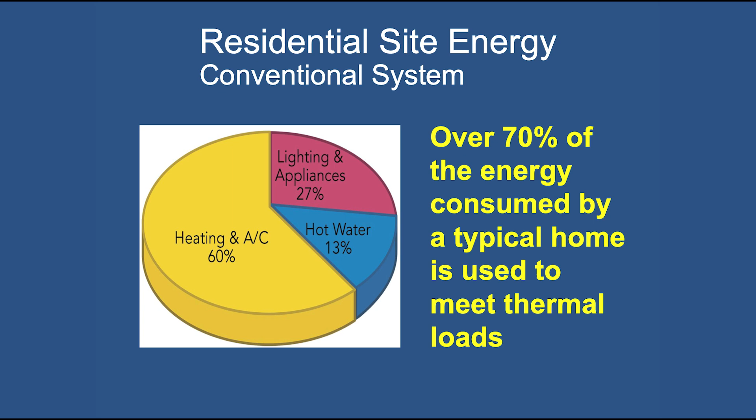Commonly, as many of you know, in the average residential home, over 70% of the energy used in the home goes to the heating and air conditioning and the hot water use. By going to geothermal, we can commonly extract near 50% of that energy from the ground, and by using 18% of energy, which we're using from electricity to run our geothermal heat pump, we can run our home and our air conditioning for the house.

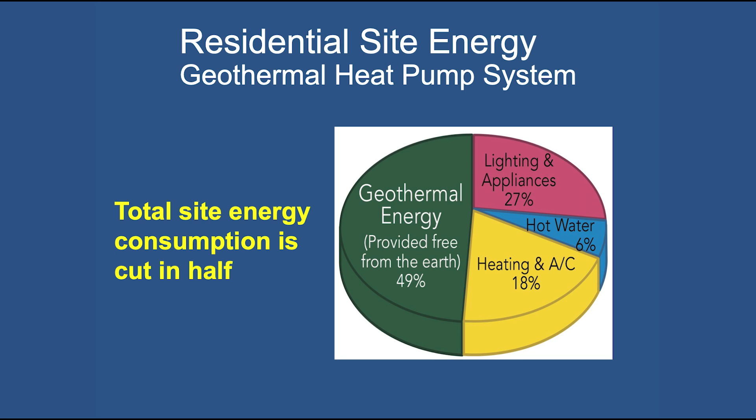So how does geothermal work? I like to break up the system into 3 portions. There's the earth coupling, which is the fancy word for what's outside. There's the heat pump, and then the distribution system in your home. Let's first look at the heat pump. I have a big stand here, but that would be an example of what would replace your furnace. It doesn't look a whole lot different than your furnace now, maybe a little bit taller, commonly 5 feet tall with a footprint of 3 foot by 3 foot.

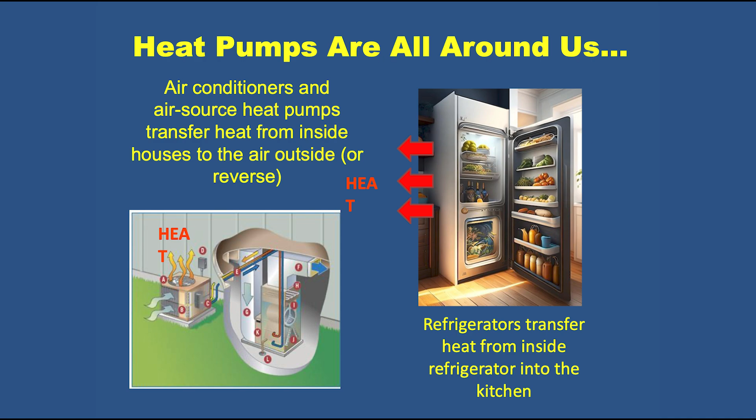So how do heat pumps work? Everybody in this room today has a heat pump in their house. Your refrigerator. The refrigerator takes heat out of the inside of your fridge and delivers it to your kitchen. If you've ever put your hand on the back of the fridge or the bottom of the fridge, you notice the air is warm, about 90 degrees. A geothermal heat pump or any heat pump works on that same technology.

We're moving heat. So instead of taking energy out of your 30-degree fridge or your 0-degree freezer, we're taking energy out of 50-degree water. And we are able to produce 110-degree air or 115 to 120-degree water to then heat our homes. So I love to look at this visual. The original refrigerators, you truly got to see the condenser where you were rejecting the heat in the fridge. Nowadays they like to hide it because they don't want you to see it anymore. And if we don't clean our filters, our fridge locks up because it doesn't get good airflow across the coil in the back.

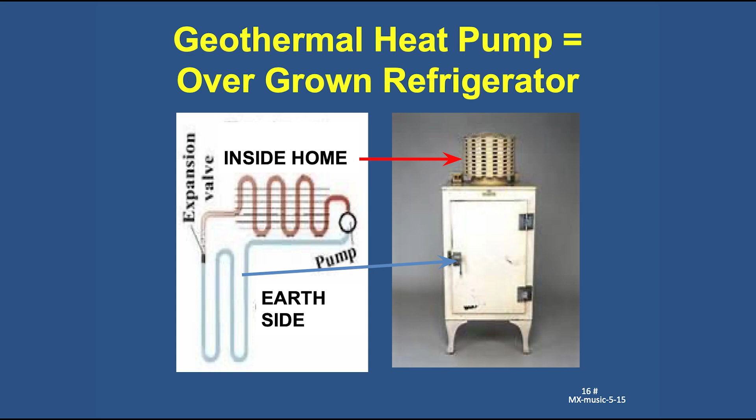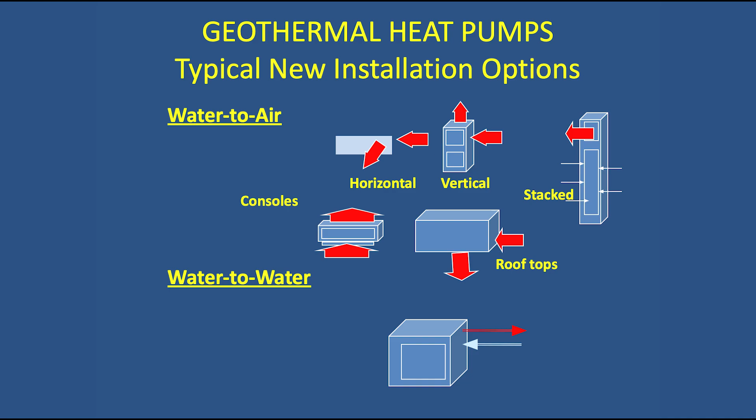So, how geothermal works. We have what's known as water-to-air or water-to-water systems. Mini splits, what many of you might be more familiar with, are known as air-to-air. And what that is, is where we're taking the energy from outside and how we're delivering it to the building. So if we were to replace a furnace that has hot or chilled air in the house, for geothermal, that would be a water-to-air application. Or if we were replacing a boiler, that would be a water-to-water application. So how does that work?

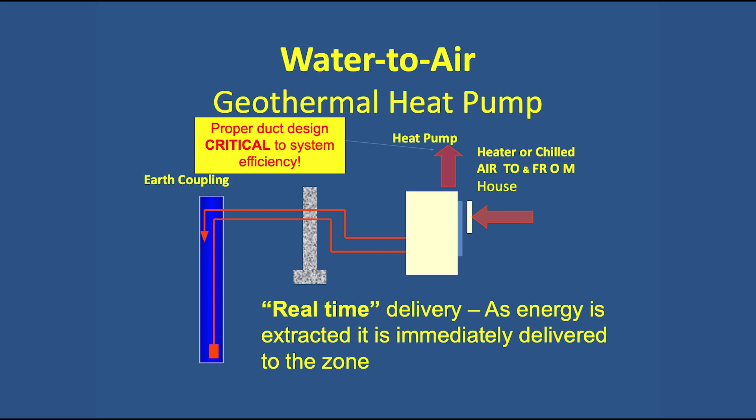We have a well outside the system, and I'm going to be talking about the different wells. We are circulating water through our heat pump, and I'll have some examples of what heat exchangers look like later. We're just circulating water through the geothermal well system and extracting heat from it, commonly 5 degrees of heat, which we're able to compress in the refrigeration cycle and heat our homes with.

On a boiler application, or furnace application, this is what it would look like. Replacing a boiler, we would have a heat pump that looks much like your boiler now, and that would heat a hot tank of water, or in the air conditioning months, a cold tank of water. Then we would recirculate water through our house from that.

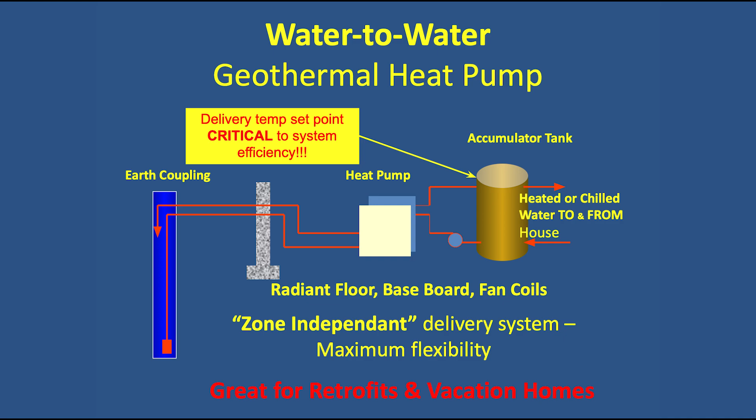Now, earth coupling. There are 3 main types of earth couplings, but in New England we really only see 2 of them. So we have standing column wells, open to injection wells, and closed loop wells. The last numbers I saw, about 80% of the residential systems installed in Massachusetts were closed loop wells.

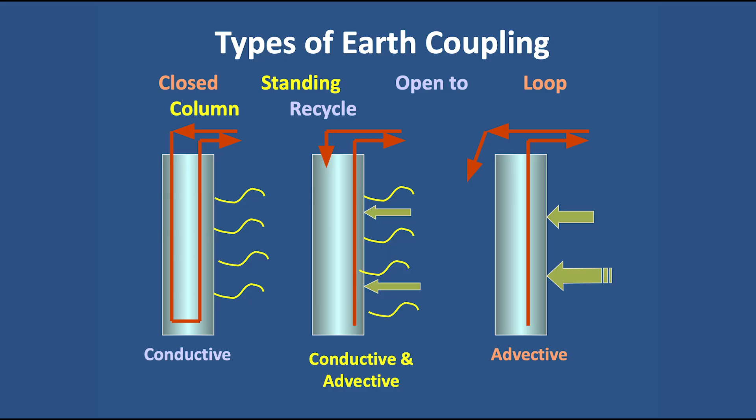Here, in a very plain way of looking at it, are the 3 well types. Starting all the way to the left, we have a closed loop. I like to think of this like a radiator buried in the ground. They've drilled a hole, and we've buried a pipe, and we're recirculating water through that pipe, and no earth water is going in and out of the building.

All the way to the right is what's known as an open to injection loop, or open to recycle. These are the least common systems. Where you see these are on Cape Cod or on Long Island. This is a well where we hit a significant amount of water, and we're never returning that water back to the same well - a well producing 100 gallons a minute. That's extremely rare in your average areas, but on Cape Cod and Long Island it's extremely common because they have a lot of water.

In the middle here, we have what's known as a standing column well, which is where we drill a well like your domestic water well or drinking water well, and then we run a return pipe back to it, and recirculate the water that way. I'll have a couple more examples and pictures later.

If you're curious, the heat transfer: you have advective heat flow in the open loop because the fresh water is always bringing it in. A closed loop only has conductive heat because the heat has to work its way through a plastic pipe, which I'll have examples of later. A standing column well is both.

So closed loop, again the most common in Massachusetts, you have both horizontal and vertical closed loop wells. In 16 and a half years doing geothermal, I have seen 5 horizontal closed loop wells because we just have too much rock in New England to drill horizontal well fields. In Oklahoma and Nebraska, they do plenty of horizontal systems, but in New England you only see vertical well systems.

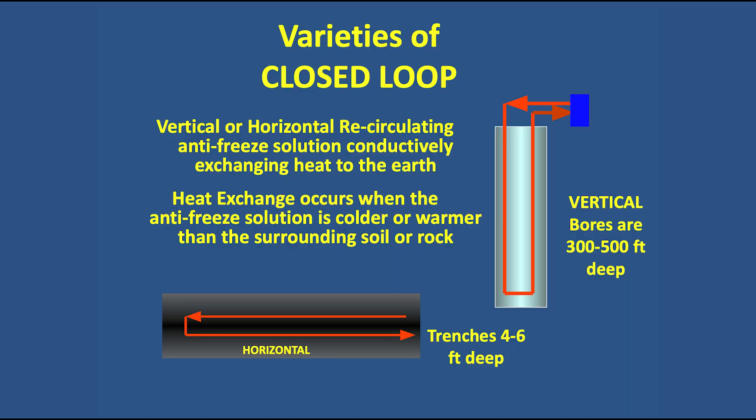The Squamscott Elementary School is installing a vertical closed-loop well system, actually drilling 85 500-foot boreholes for that elementary school, arranged in a grid formation, which goes to a geothermal vault, and then we pipe that water into the system. Total flow of that building is around 300 gallons a minute.

Other horizontal systems I like to share are slinky systems, which literally look like the old slinky toy we played with as kids - they just stretch it out in the hole. Or most vertical systems, I'll show you, and I also have an example of a concentric later.

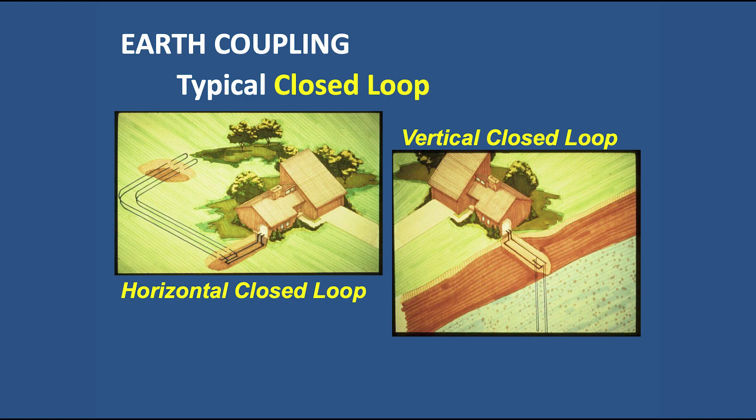Here's what your average residential system would look like. Your average residential system has 2 to 3 boreholes - again, the example on the right, not the example on the left. The only times I've seen a horizontal well installed is when the homeowner was his own civil contractor, so digging a trench wasn't that big of a deal for him.

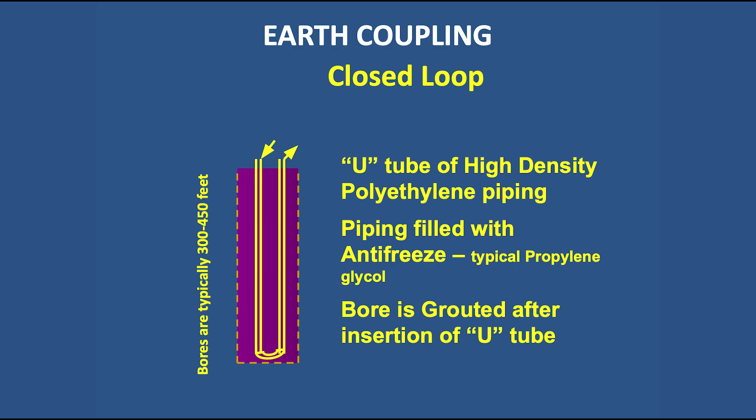Again, what that closed loop well looks like: they're commonly drilling 300 to 500 feet deep, commonly 4 to 5 inches wide, and then we're burying a 1.25 inch pipe all the way down and back up the well, circulating a water and glycol mixture through that. We're using propylene glycol, which is environmentally friendly, so god forbid we ever have a leak, it's not detrimental to the environment. Unfortunately, some states still allow ethanol and methanol, but luckily Massachusetts is not one of them.

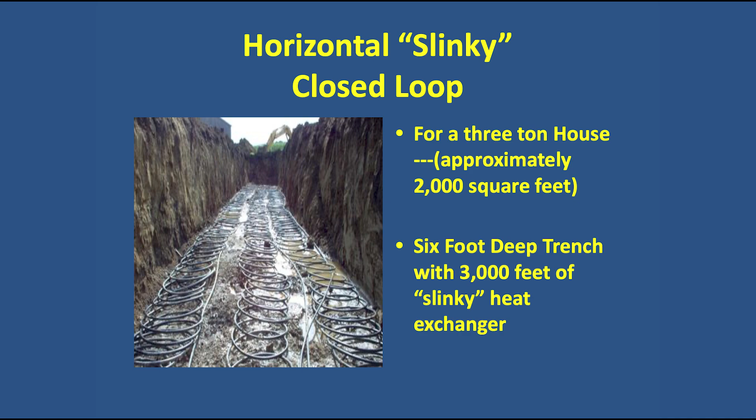It's a closed loop system. What happens is when the loop gets charged, it actually sinks to the bottom of the pond. So what you need is a minimum depth and a minimum area of the pond. These aren't common, but they are more common than you might believe.

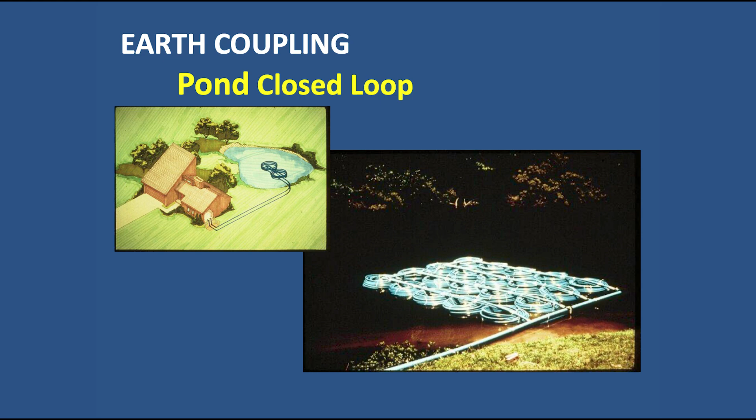Standing column wells are the second most common system we have in New England. Commercially, these are much more common.

Residentially, it depends. If you have to drill a drinking water well, standing column wells become more common because we can use the same well for both a drinking water well and our geothermal well.

So what this basically works off of is just like our drinking water well, we have a pump in the bottom of the well where we're pumping into the home, but instead of using that water like we do in our sinks and our showers, we're just sending that water back to the well, and that's our recirculation loop. The benefit of standing column wells is we're getting direct heat transfer with the earth.

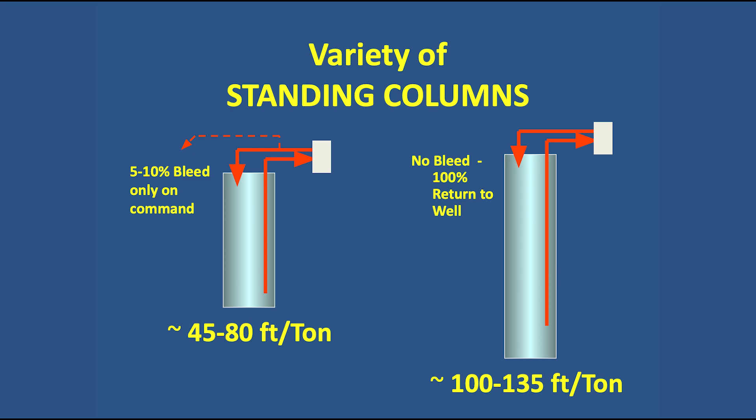We don't have to transfer heat through a plastic pipe. That allows us to do less drilling on open loop systems, but we have to take into account what the geology is, and water quality becomes much more critical.

So that's always the trade-off. Another trade-off of standing column versus closed loop is once a closed loop system is installed, all the motors and pumps are within the building or the vault. On a standing column well system, we have a geothermal well, or we have a well pump in our well.

So commonly what that looks like on a residence is we have our pump at the bottom. Your average geothermal well system would look like a 400 to 800 foot well, depending on how large your residence is. And then a return pipe back to the well.

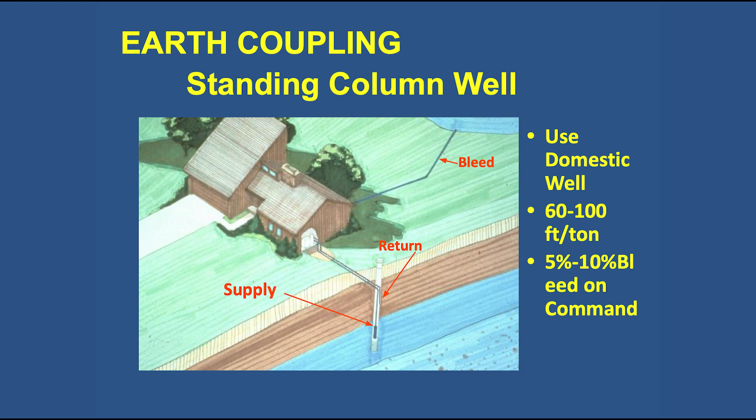When you do commercial standing column wells, I commonly go up to 1,500 feet deep and drill multiple. One of the largest systems I did for standing column wells was a 615,000 square foot nursing home in New Hampshire that had 16 1,500 foot boreholes in it.

Open to injection, which is again the least common, is where we hit a lot of water, where we're pumping from one well commonly to a return well. I like to drill the return well, or the diffusion well, larger. It's a lot easier to get water out of the earth than it is to put it back in.

So commonly you need much more return wells than supply wells. Again, these are not very common in this area. If we were on Cape Cod or Long Island, I'd be singing a different tune.

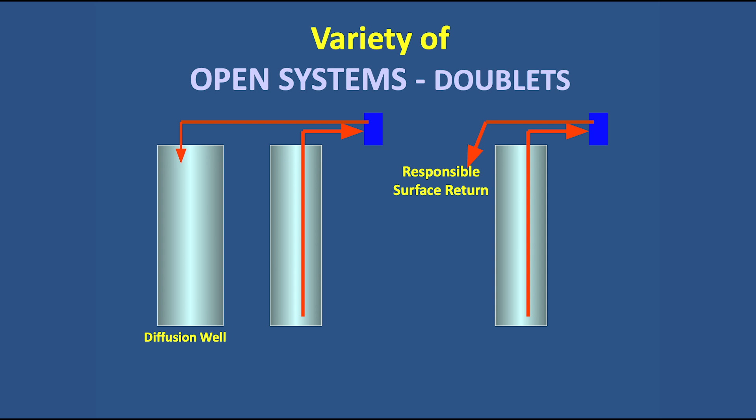Here's a chart: good, better, best. Again, these are all extremely efficient, but I just like to compare the three technologies. The reason open to injection is the most efficient is because your well temperature never changes.

You're always using fresh water which is at the same temperature. So for example, our well temperature would always be 50 degrees.

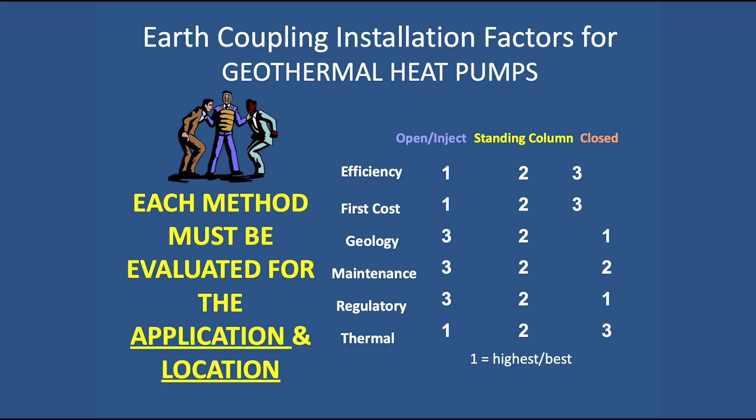Closed loop of the three would be the least efficient, but is still more efficient than any other heating or cooling device you can find out there. For first cost, closed loop again is the most expensive of the three, but we can pretty much do closed loop anywhere.

Because we don't have to worry about water quality or geology as much. Obviously we care about conductivity, but we're able to do closed loop much more often. That's why in geology, closed loop is always number one and open to injection is the least common.

Maintenance, they all have their different maintenances. Closed loop, probably the benefit of closed loop is all the maintenance is within the building, and there's no more maintenance outside of the building once the system is installed.

For regulatory purposes, closed loop has the least amount of regulatory checklists, and for thermal conductivity, it all comes down to sizing properly, but the benefit of an open system is you always have fresh water flowing into the system.

The mantra I like to use is site-specific when asked what's better, closed loop or standing column, because those are the two most common systems. If I can do standing column and the geology lends itself, I usually lean that way. But if there's maintenance reasons, or if the geology or water quality is ever in question, closed loop is always the way I go. For Squamscott, that was a worry for us, the water quality, possibly brackish water, which is why we really only looked at the standing column or the closed loop system.

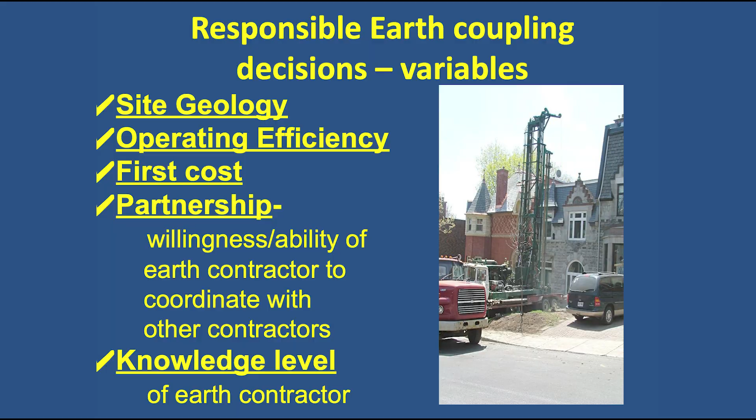Here's some examples of how close you can drill a well to a building. We've drilled wells 10 feet away. This was actually at Harvard, quite close to the building, so you'd be amazed how tightly you can get into the infrastructure. I've drilled in downtown New York and downtown Boston, so you can find a way. DigSafe doesn't always love us when we're asking where we have to dodge, but you'd be amazed how many well systems there are in very tight areas. Thank you very much.

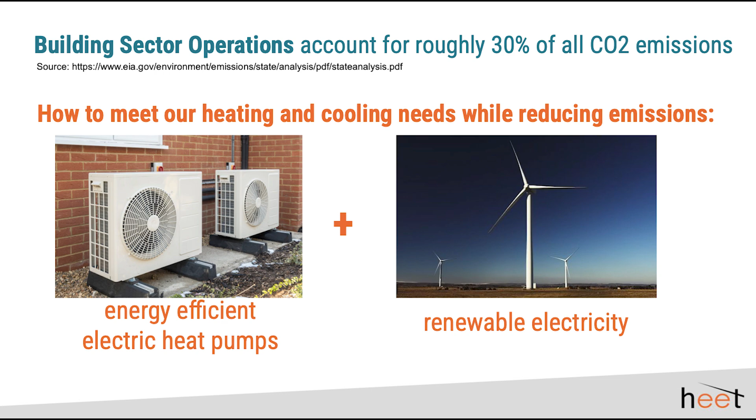As Sarah alluded to, the climate goals of the US and Massachusetts—we have them. We have targets for 2030 and 2050, and a large part of the strategy to meet those emissions reduction targets is to electrify our economy. 30% of our emissions come from building sector operations, so that means there's a huge opportunity here to cut a third of our emissions.

Currently, the strategy is to pair renewable electricity with energy-efficient electric heat pumps. The ones I'm showing here on the left are air source heat pumps, but heat pumps all the same are ultra efficient, and they use electric energy that will be more and more emissions-free as we decarbonize our grid.

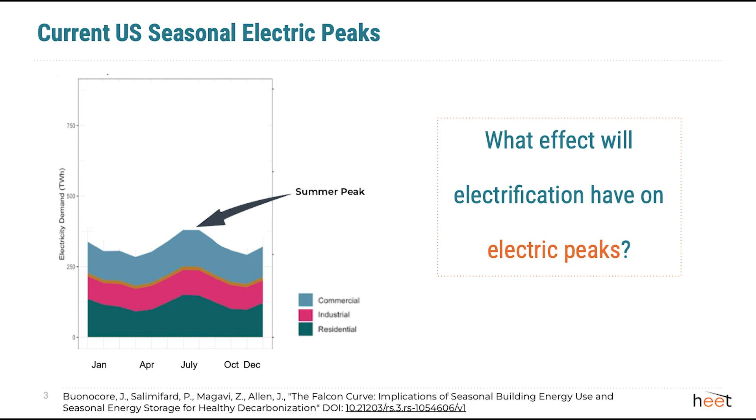So this is what our electric peaks look like currently in the US. Currently, we turn on our ACs in the summer—that's when most of our electric use is, when we have our window ACs cranking. So when we electrify our heating and cooling in all of our buildings, that's the dominant strategy for this 30%—what will happen to our electric peaks?

I want to remind folks that our electric peaks, the highest amount of energy that we need at any given point, is what our grid is sized for. So any increase in those peaks will dictate the size that we need for our grid to reliably meet the demand of electricity.

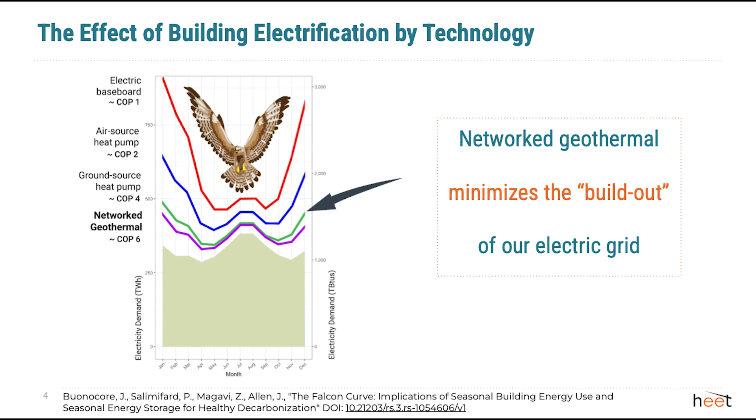So here is a graph. If you snapped your fingers and overnight you electrified, here are the different electric peak curves over a year with different technologies. If you electrify with an electric baseboard for the heating season, you can see that those peaks, that summer peak shifts to a winter peak, and that winter peak is really high, like the wings of that falcon, the wings of the falcon.

And you can see here on the left that it's correlated to COP. COP is coefficient of performance, essentially how much energy can you use based on how much electricity you're pulling from the grid. If you have an air source heat pump rather than an electric baseboard for your winter heating, the wings start to come down, that peak starts to come down.

And so the more efficient technology that we use, the less the build out of our electric grid will have to be. The electric grid is paid for by the rate base, by customers. So this, in turn, affects the electric rates that we pay. And so having those wings of that falcon as low as possible is really critical in order to not only meet the goals, but do so in an uber efficient way that minimizes the build out and the investment that we'll have to make into our grid, which will take not only money, but time to build out.

And so if you can see, ground source heat pumps with a coefficient of performance of 4 is this green line. It's pretty good. Networked geothermal is a little bit more efficient here. You can see this purple line is the lowest. And so I'm going to talk to you a little bit more about that.

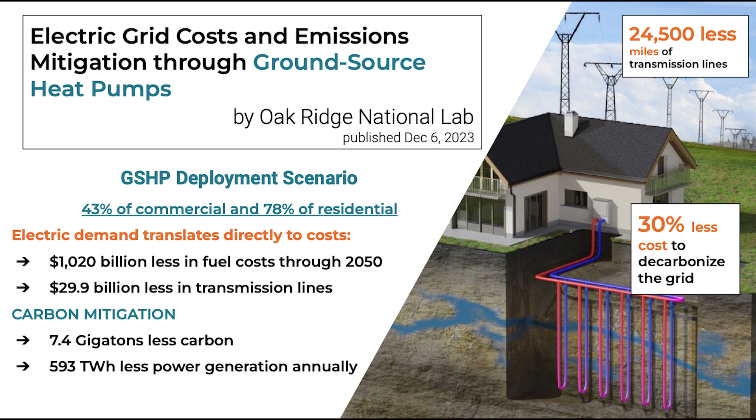This is a report from the Department of Energy. They commissioned Oak Ridge National Lab to do a similar study to the Falcon Curve. The Falcon Curve is impact on our electric grid, but they included how much transmission we would have to build out against an air source heat pump scenario, because air source heat pumps are really dominating the heat pump market. Everybody wants an air source heat pump. And so it was really important to compare them apples to apples.

And it would take 30% less cost to decarbonize our grid with ground source heat pumps compared to air source heat pumps. And it would take 24,000 less miles of transmission lines, which again takes time. So this not only reflects the overall cost of our energy transition, but the time that it would take to actually enact this energy transition.

And of course, in any operation, to even build transmission lines to move renewable energy, there's still emissions associated with those operations. And so those are hidden emissions that would also be a part of that. So I want to just leave you with this message. Efficiency matters. It is really, really important.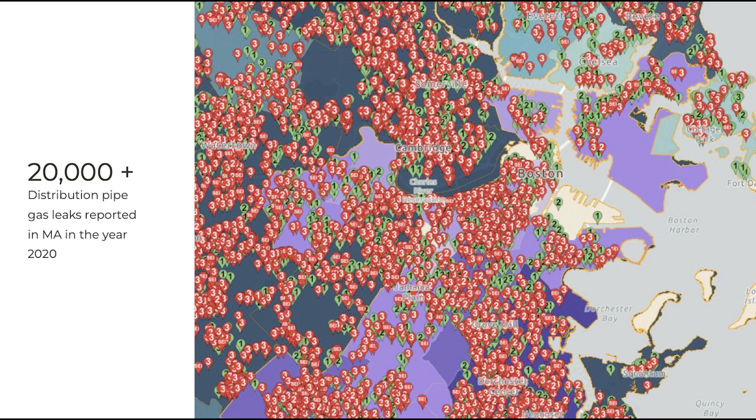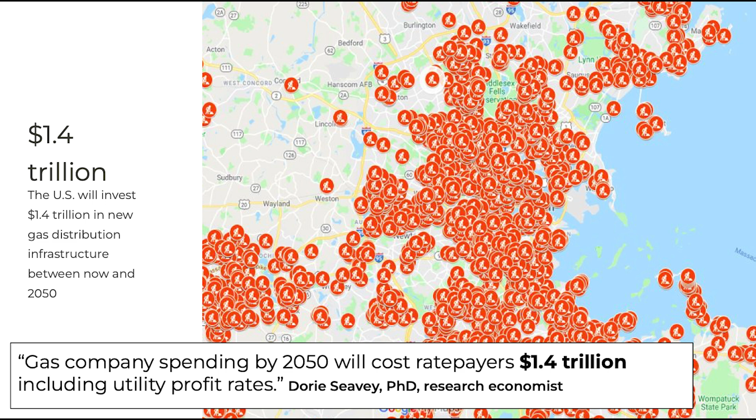Economist Dorie Seavey did an analysis on gas pipeline replacement in Massachusetts and estimated the cost to be $1.4 trillion. These are dollars that we're quite literally stranding in the ground. We won't be able to use these gas pipes after 2050, maybe before, and we're shoveling money into the ground. This is the stranded asset problem. And so why not use those $1.4 trillion to invest in renewable energy instead?

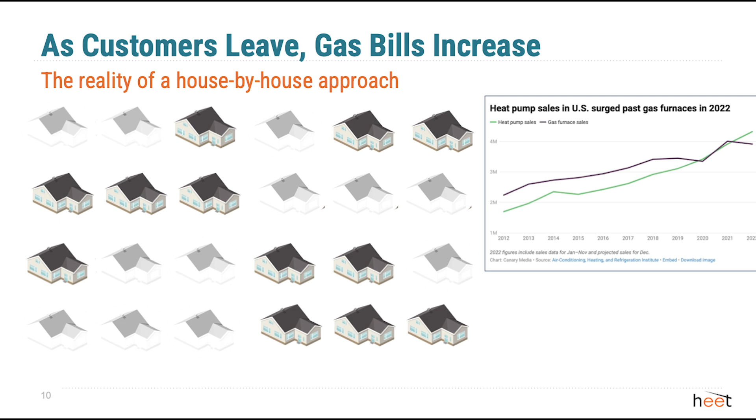So I like to show this graph because we have a graph here on the right of heat pump sales. A lot of these are air source heat pumps, as I mentioned earlier. But they're outselling gas furnaces, and they continue to outsell gas furnaces. And so currently, electrification is happening, but it's happening on a house-by-house basis or in an unmanaged way.

So what happens when we electrify in an unmanaged way? Well, folks that can afford to buy an air source heat pump do, and they electrify their homes. And when we still have the same gas system, just less customers paying into that rate base, our gas rates go up because there's the same amount of expenses to pay for, but just less people.

And so as gas rates go up, people really start to flee the gas system. And this is called the utility death spiral, or the last grandma problem, where you can imagine just one single grandma left on the gas system and one single gas worker running around maintaining the gas system. And that is what we're trying to avoid. We want it not only to be safe through a transition, steward it safely through a transition, but keep people in their jobs and keep rates stable.

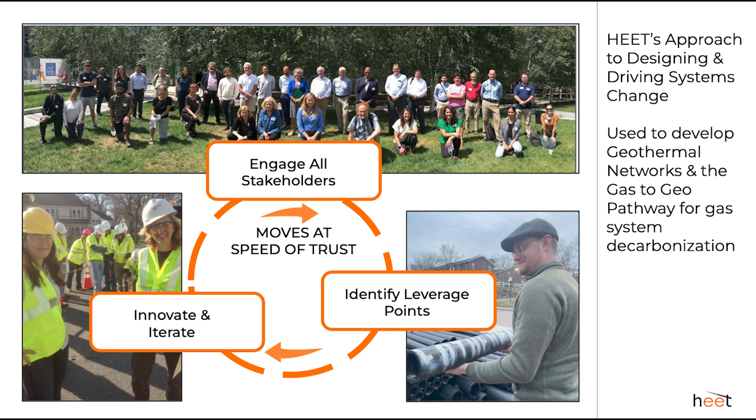So HEET, our role in this is really just to talk to people and to understand what people's motivations are from every angle, including the gas utility, including geothermal industry. What is possible to design? What do people want from a new thermal energy system? And we got this list here over many years of conversations. People want their thermal system to be secure and safe. We want to move into the new age of renewables, so making sure that it's 100% renewable, reducing our carbon emissions. They need it to be reliable.

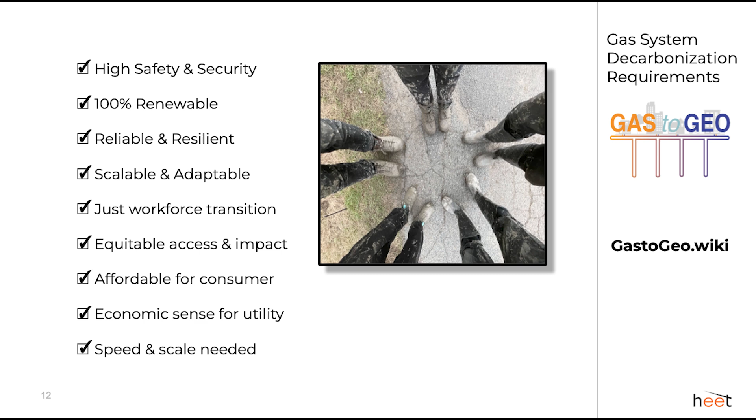People need to be warm in the winter and cool in the summer, especially as summers get hotter, and resilient to blackouts or brownouts or anything like that. Scalable and adaptable is something that came from the engineers. You want to be able to interconnect these systems and grow these systems over time. A just workforce transition. So what happens to the gas workers? We need to make sure that they're taken care of as well. They've been fighting for 100 years for good wages. It's a risky job, but they should be stewarded as well, not just the technology.

Equitable access. So to be able to give anybody and everybody access to a renewable energy technology despite their income or education level, and affordability. So maintaining good energy rates, low energy rates, affordable rates. And in order for a gas utility to see a new business model with this technology, it needs to make economic sense. All at the same time, we need to do it quickly, and we need to scale really, really fast if we want to meet our climate goals.

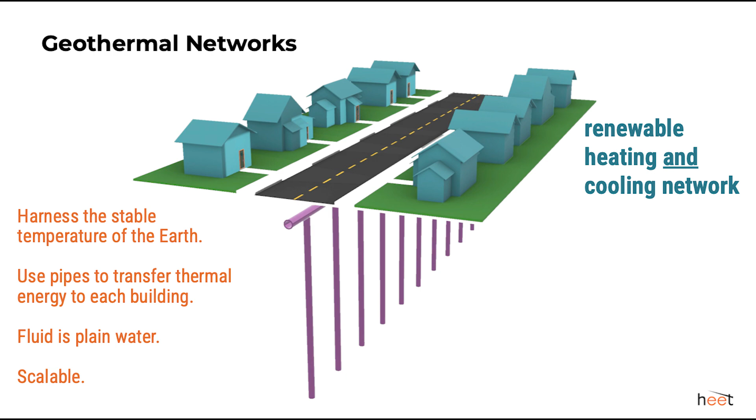So after a lot of conversations, a lot of charrettes is what we call them at HEET, community charrettes, with engineers, chemists, all sorts of folks, geothermal networks emerged as the technology that has the potential to meet every single one of those parameters that I showed in the last slide. And so I won't explain too much because Zach already did a fantastic job, but this is what it would look like in a community. You just have a main loop in the right-of-way of the street with service lines to every home.

And either in the right-of-way or someplace else, you can have bores, vertical wells that harness the temperature of the earth. This would just have plain water or plain water with food-grade glycol, as Zach mentioned, and it would add the provision of cooling. It wouldn't just be a heating network, but now it would add cooling, which, as I stated, we need. Folks that are vulnerable, children, folks with asthma, the elderly, suffer from heat waves, and this is a way that we can equitably provide cooling as a service.

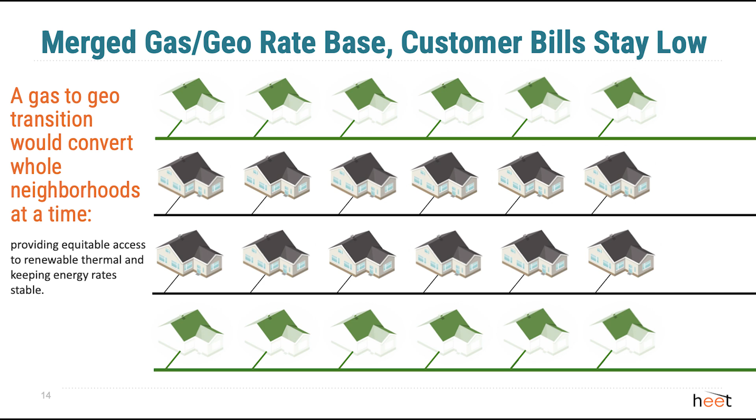So what HEET has proposed is a merged gas-to-geo rate base, where instead of having an unmanaged transition, we convert entire communities at a time, maintaining that very important balance of infrastructure to customers so that our rates don't spike. And it provides equitable access to anybody that's on that street, no matter their income or education level. If a utility or a geo utility comes knocking on the door offering the service, they can opt in.

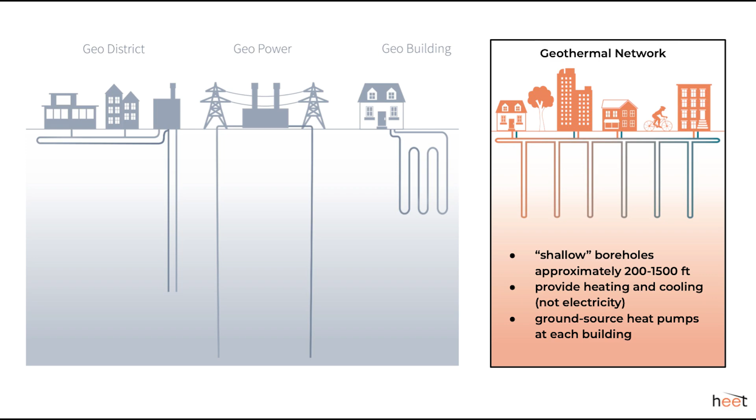So the capital investment is done by some utility. It can be a gas utility that wants to transition into a new business model using pipes, but just water pipes, or it can be a developer. There are geo utilities that do this as well, and can come and install shared infrastructure, finance that, and then everyone just pays into the rates.

We're not talking about a geo district, which has a massive heat pump that circulates hot water, for example. There's efficiency losses if you do that. When you have an ambient temperature loop, you actually have an ultra efficient system. We're also not talking about geopower, where we're going super, super deep into the earth to create electricity. This is for heating and cooling, moving water, and then the heat pump moves energy.

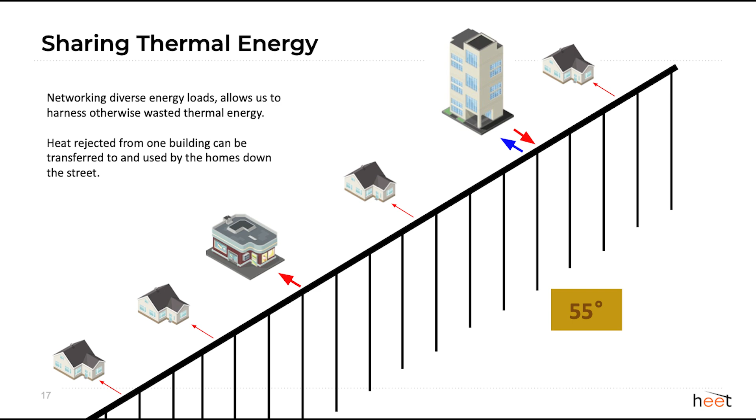So why do we care about networking? Energy sharing. So I'm just gonna go really quickly through what the benefit is of networking. So we have different types of buildings, typically in a town center. We have residential, maybe a grocery store, and an office building. And some of them are rejecting heat, while others are absorbing heat, even in the same time of the year. So imagine this office building has a bunch of computers in it, humming along, a bunch of people in it. If they're in cooling mode, that means that they're rejecting heat.

That heat can be captured by this shared loop. And since the loop is shared, that heat can then be used by any of the other buildings on the loop. This means that the bore field infrastructure actually can be minimized because there's already this synchronous load sharing, or this load canceling that's happening by connecting the buildings together. So you want diverse load profiles; usually residential and commercial can be paired because their load profiles or energy use throughout the day is different.

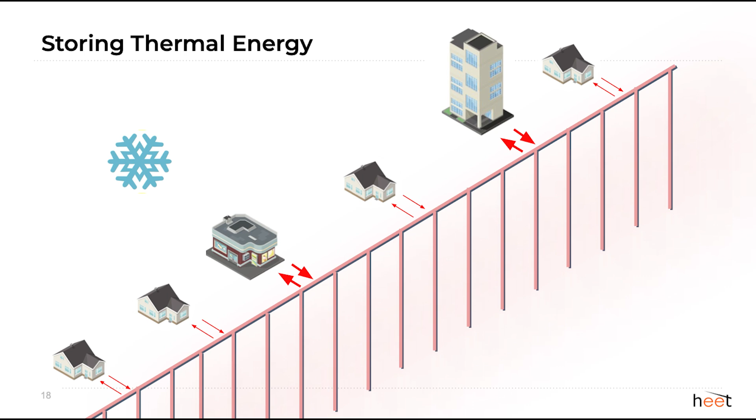And bore holes, bore fields, geothermal can also provide thermal storage. So in the summer, while everyone's in cooling mode and everyone's rejecting heat into the loop, that heat will then move through the boreholes into the subsurface, and then can be pulled out later in the winter. We have thermal storage as well.

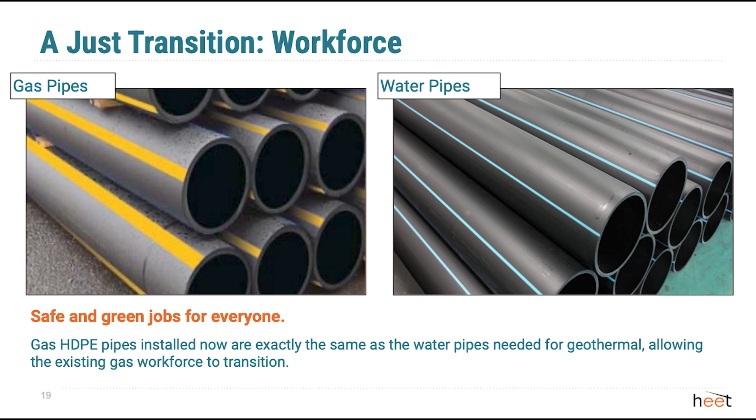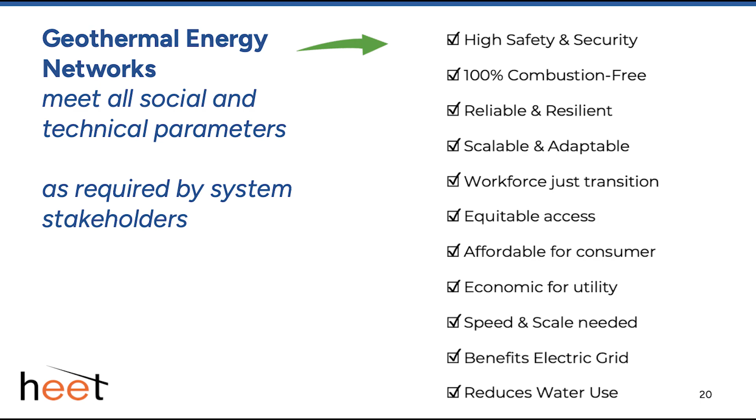The pipes are HDPE pipes. They're just a different diameter because the energy density is different, but the materials that are used to install new gas pipe today are the same materials that we can use to install geothermal pipes in the future. So a lot of the skills from the pipe layers of the gas workforce can actually transition into the clean energy economy. So just to reemphasize the list, this is what was required by system stakeholders through many conversations, and geothermal networks have the potential to meet all of them if done correctly.

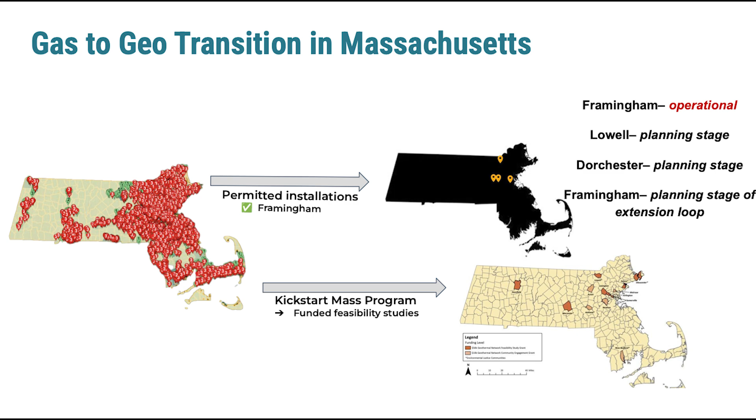And Sarah talked about this. This is the Gas-to-Geo transition in Massachusetts. So HEET started mapping gas leaks, and we educate folks on the whole picture, zooming out to the impact of a large-scale thermal transition. And because of that, folks require technical assistance to take it further, to look into a feasibility study, to engage their community on the topic, to host these kinds of meetings. So we developed a Kickstart Massachusetts program for feasibility studies. Gloucester is a recipient of one. So currently there are 12 communities exploring the concept formally through this program, and more informally through conversations and our resources that are open source.

We also have, in order to maximize the amount of learnings and share back to the public, to you all, to anybody that browses our website, developed this research team that includes the National Renewable Energy Laboratory, Berkeley National Labs, Oak Ridge National Laboratory, UC Berkeley, MassCEC is our funder, just a whole bunch of really great, really smart people, to collect as many learnings as possible from the pilots that are happening in Massachusetts.

One of the sub-teams is creating a digital twin, or basically a working model of the system, so that we can learn through a virtual model rather than learn through physical project implementation, which will take longer and cost more. So we can actually learn through the model. It's being refined with real data from the pilot projects in Massachusetts.

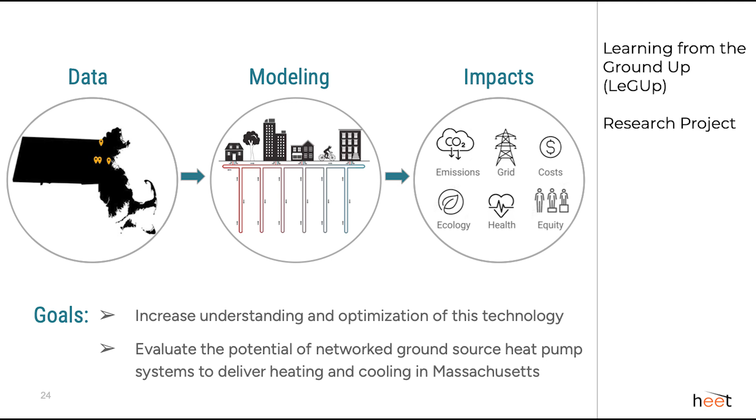And everything that HEET creates, everything that HEET does is open to the public. We post it as fast as we can to our website. And you're able to adapt it for your own community and use it.

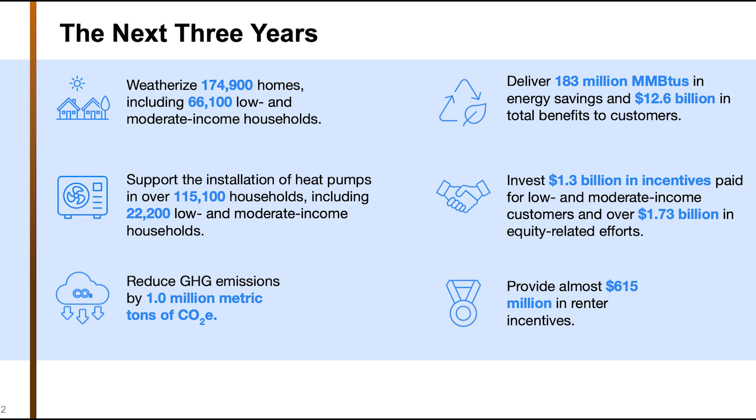I don't need to go through all of these, but what I'd like you to take away from this is there's a lot of effort and time and money going into trying to help you all be successful at this decarbonization journey, and the goals that the program administrators, the utilities across the state, have made to try to support this effort are quite in depth in terms of trying to weatherize more than 174,000 homes. Huge goals. Trying to reach more low and moderate income folks in the state.

Developing new and different programs to reach audiences that are making more than the low income standard group that have been receiving great incentives up until now. We now have more moderate income incentives available for folks in the next 3-year plan. Those are going to also be impacting the heat pump programs. So I want to make you aware of some of the things that are going on that could impact you or your neighbors or others in Gloucester.

So this is going to be in the slide deck. I don't need to go through all of this, but just put it up there to let you know that there's a lot of incentive funds that are going to be available to you to help you with your efforts.

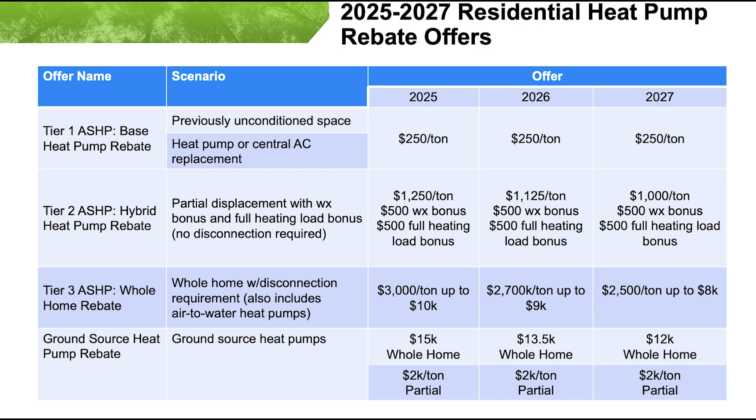Ground source heat pumps are a great solution to implement if you're able to afford them. I strongly encourage you to take advantage of the resources here. As Zach was saying, it's the most efficient way of going about this effort. For some folks, it's not financially feasible, so there are incentives available in the other categories as well. That's why I'm giving you all the information.

The program's changing a little bit over the next 3 years. Those of you familiar with what's offered today know you can use incentives to partially decarbonize your home or fully decarbonize your home, and that's going to continue into the next 3-year plan. There will be bonuses offered for folks who get weatherization along with doing the heat pumps in your home — you can see some of those listed. In some categories, the incentives offered will go down a little bit over the 3-year plan, so there's motivation to act earlier rather than later, but still really great incentives that can help you with the efforts in your home.

The other piece that's important is that a lot of people use the HEAT loan — I know HEET is used a lot here, H-E-E-T, but this one is H-E-A-T. This is the loan available to those who get a home energy assessment, or who have recently done one, and are eligible for additional funds through a 0% loan. In the past, it's been used to do the efficiency measures recommended in your home energy assessment.

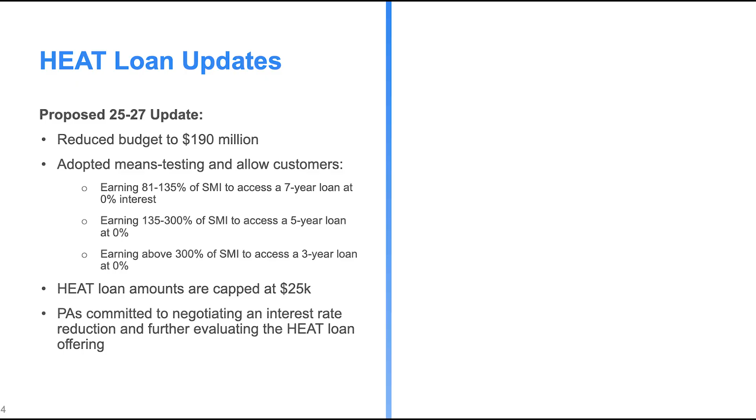So that loan program is changing a little bit. Based on your level of state median income, you're going to be eligible for 0%, but depending on where you fall, that may be a 7-year loan, or if you're at 135 to 300% of state median income, it might be a 5-year loan, or if you're earning above 300% of state median income, they're reducing that to a 3-year loan. They're trying to make the funds they have available go further for the people who need them most, and that's why it's been changed a little bit.

HEAT loan amounts are also being capped at $25,000, which is a bit of a change from the current program, so I wanted to point that out. I'll send the details to Maureen so she can distribute them, and since you all gave emails, you'll have that after the event.

I think that's all I have to share. Please come see me, and we can chat over near the showcase house, but I appreciate you inviting me here.